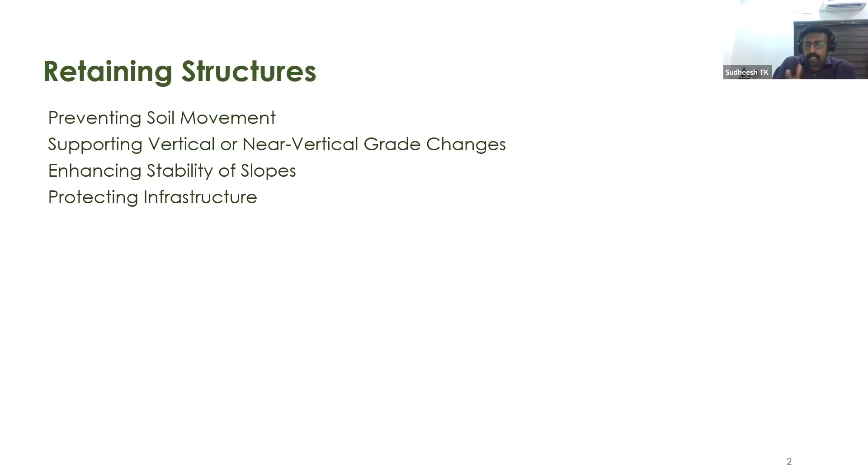There are different types of retaining structures, starting from gravity retaining wall, cantilever, counterfort, and many others. But based on construction approach, we can broadly classify these into two categories: one is bottom-up approach, and the other is top-down approach.

In bottom-up approach, most retaining walls like gravity retaining wall, cantilever, counterfort, and reinforced earth wall all come under this category, because we start construction from the bottom and then go upward. For example, cantilever wall construction starts with leveling the ground, then constructing the base slab, then going upward. Reinforced soil is similar - we put soil in layers, add reinforcement, and compact the layers.

Whereas in the other approach, top-down construction, we are installing or constructing from the top in the downward direction. One good example is sheet pile wall - we drive the sheet pile from the top into the ground.

Similarly, soil nail can be considered under top-down, even though we can use it in bottom-up construction too. Just like reinforced soil, we can compact soil and put nails in, or we can first fill and compact, then install from top to bottom. But typically, especially for excavations, vertical cuts, or slopes, we generally start from the top and progress downward. We can do it the other way in some special cases.

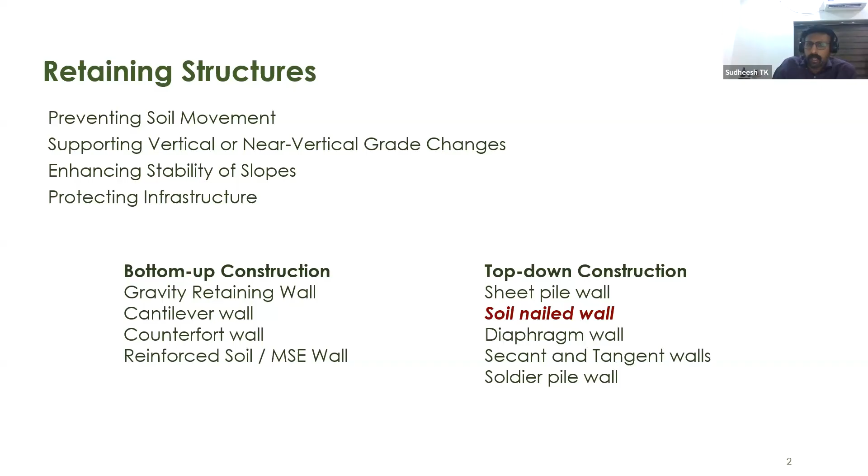Similarly, diaphragm wall, secant pile, tangent pile wall, and soldier pile all come under top-down construction. Now, let's focus on soil nail.

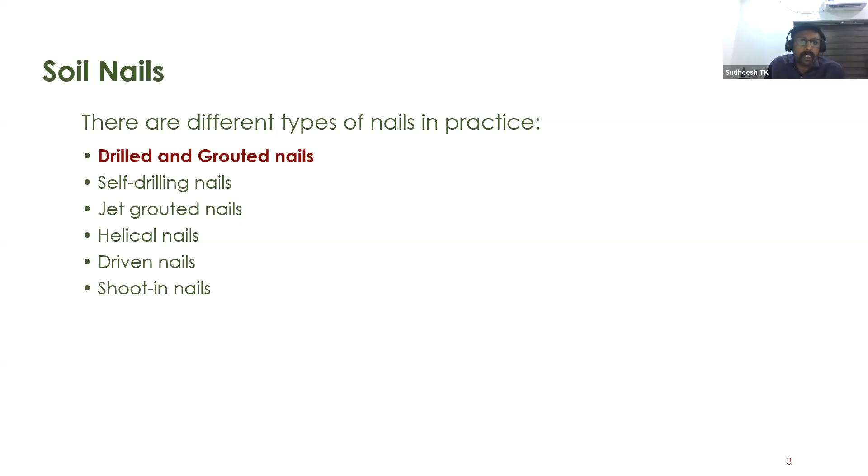There are different types of soil nails used in practice: drilled and grouted, which is the most commonly used one, self-drilling, jet grouted, helical driven, and shoot-in nails. Among these, drilled and grouted soil nails are the most popular.

We place some spacers as well to ensure it is exactly in the middle of the hole, then we pour grout. This grouting can be done either as gravity grouting, where we just pour and fill it, or as pressurized grouting. For pressurized grouting, in conventional pressure grouting we have to use packers to build the pressure, otherwise we cannot build it. Pressure grouting can improve the pull-out resistance significantly.

But pressure grouting has a disadvantage as well - sometimes this grout may go somewhere else. We don't know if there are cavities, and it may keep going. So that can happen.

Recently, we have developed a membrane-confined pressure grouted soil nail, for which we have applied for a patent. What we do is attach a polyester membrane around the nail, and the grout fills that membrane and expands. So the grout cannot go anywhere out - instead, it expands. This simulates a cavity expansion scenario and thereby improves the pull-out resistance significantly.

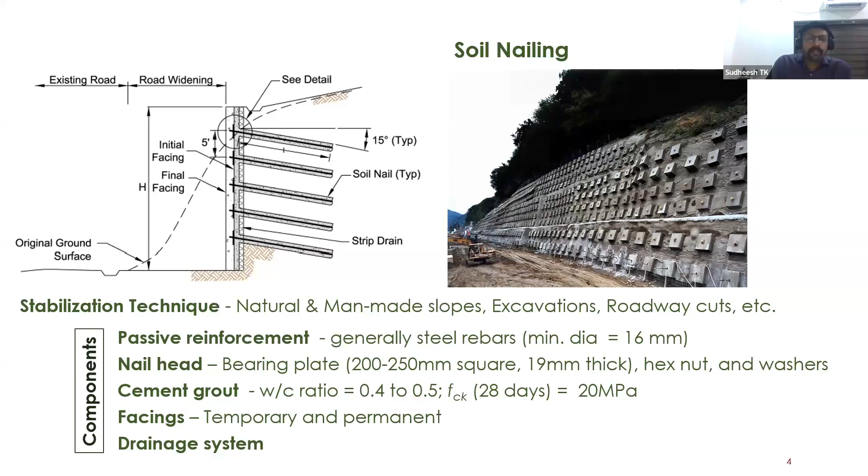So the three important references we generally use in the Indian context are: the MORTH specification for road and bridge work, where section 3200 talks about soil nailing, though it's only 4-5 pages and not in much detail. The FHWA manual covers soil nailing in detail and is available online for download. Then there is the British code, BS 8006-2, which is also for soil nail but not freely available; we have to pay for it. So these are the three codes generally used in India for the design and construction of soil nailing.

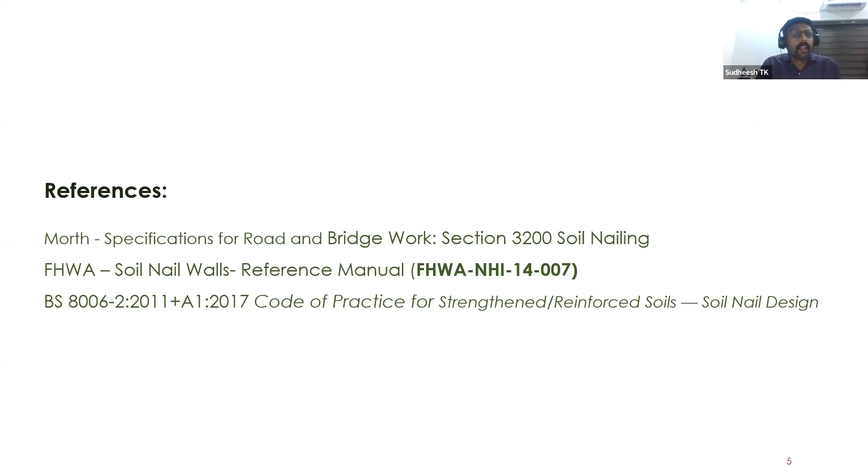Now, if you look at the cross section, on the right, the left image I have already discussed. In this particular case, we can see a dotted line, that is the original ground surface. Maybe in connection with the widening of a roadway, we are cutting this triangular portion of soil, and to support the remaining soil we are using soil nailing.

Though we could use a reinforced concrete retaining wall instead, the issue is the base slab. We can design with a longer heel slab, which increases the moment, and the soil on top of the heel slab also contributes to stability. Or we can design with a shorter heel slab and a longer toe slab, which also increases the moment, but then we don't get the benefit of the soil on top of the heel slab. Considering cost efficiency, contractors generally prefer soil nailing.

But as we have seen, we have to do it very carefully, otherwise it's going to fail. That is what we have seen, so this talk is focusing more on that line.

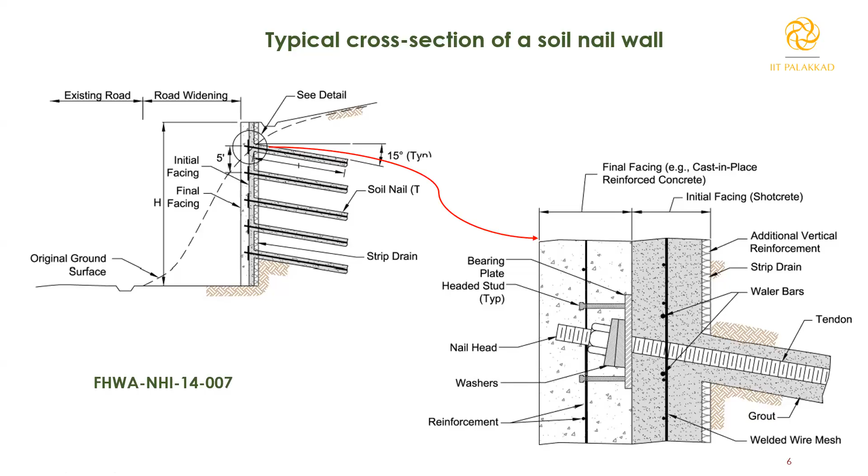Then you have, when I move my cursor - is it visible? Yes sir, okay. So you can see here bearing plate, then we have a washer and hex nut, and then there is a headed stud as well. The purpose of that is to connect this nail and the initial facing with the final facing. So we'll be tying this stud with the rebar or wire mesh of the final facing.

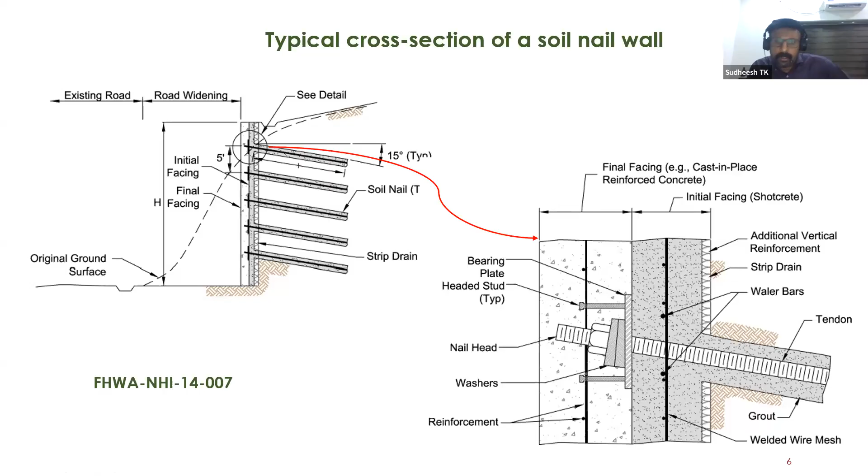Actually many people think the purpose of the facing is just to prevent erosion or ensure local stability. That is kind of true in the case of a reinforced earth wall, where we have the reinforced soil mass with facing, either panels or modular blocks. In that case, the facing is not directly contributing to the stability of the reinforced earth. It actually provides a platform or formwork for soil filling, and also prevents erosion.

Third, it provides stability against localized failure, and also serves an aesthetic purpose. This facing is actually a structural element, right? Yeah, we'll talk about that in the next slide. So this has to be designed properly. We cannot take it lightly, this facing, both temporary and permanent facing.

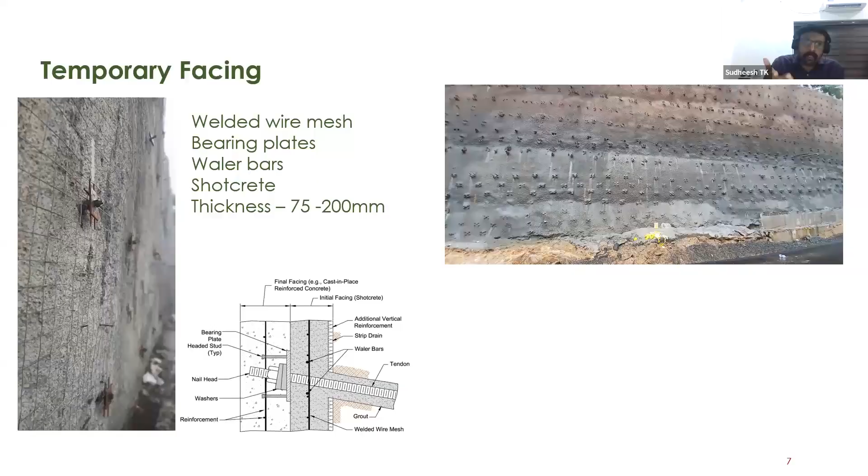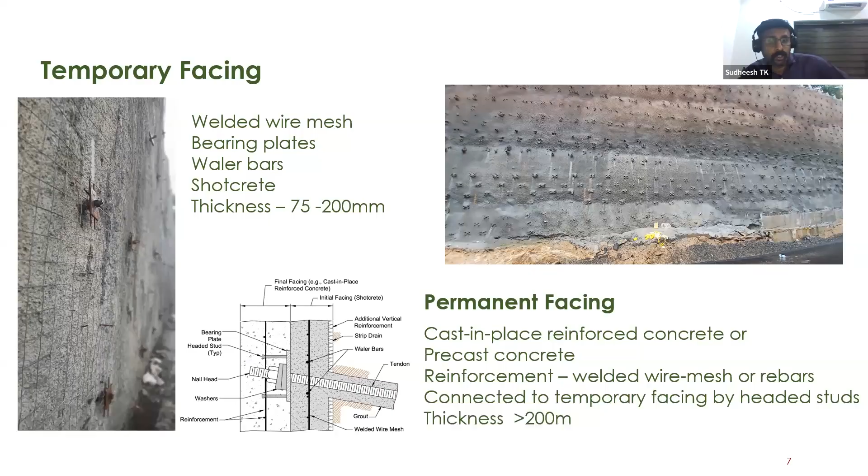Then above this, we have to put the permanent facing. When to put it, we'll talk about in the next slide when we discuss construction sequence. Permanent facing could be either cast in place, just like this temporary facing, or precast. Temporary facing is always cast in place. Also the reinforcement can be either welded wire mesh or rebars, just like this temporary facing. It's connected to the temporary facing by means of headed studs. The minimum thickness of permanent facing has to be 200 mm, that is 20 centimeters.

Now, one question: whether it is suitable in all soil conditions. That's a question you all may have in your head. Basically, the codal standards are suggesting some checks. One way you can check is when you make a cut of 1 to 2 meters, if it's able to stand without failure for about 12 to 24 hours, then you can say the soil is suitable for soil nailing. Otherwise, when you cut it, it's going to fail, and you cannot use soil nailing, you have to go for some other technique.

Secondly, during excavation, if it's below the groundwater table, again this is going to fail. We cannot use it; the excavation has to be above groundwater table. I'm not talking about perched groundwater here, but typical groundwater table should not be present. If it's perched groundwater, we can try some dewatering technique to keep it stable till construction is complete. Then we have to use appropriate drainage provisions to ensure stability.

Now, what are the favorable soil conditions? One is stiff to hard fine-grained soil. Fine-grained means soil like clay, or clay with silt-like particles, where more than 50% is passing through 75 micron - in that case we consider it fine-grained soil in general. Such stiff to hard soil, we can easily make a vertical cut without failure.

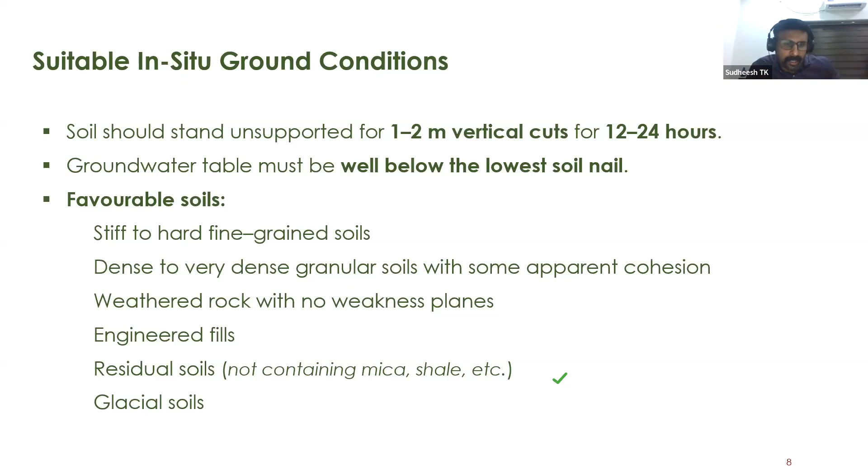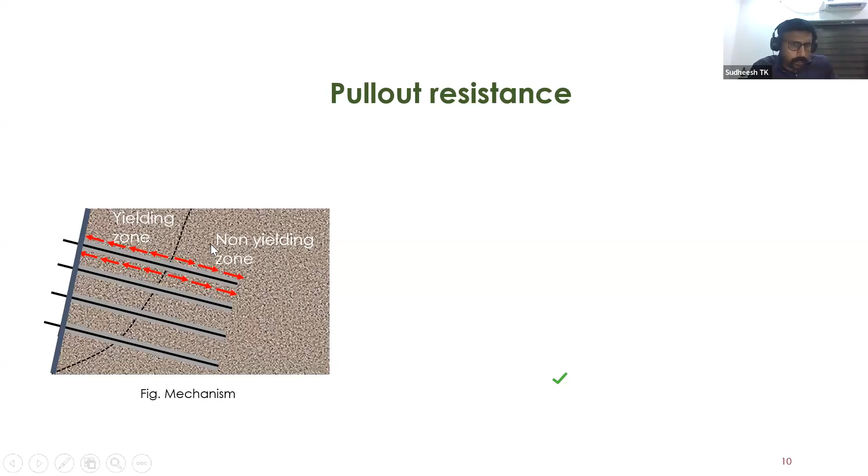Facing, okay, that's why I told you initially facing is a structural component.

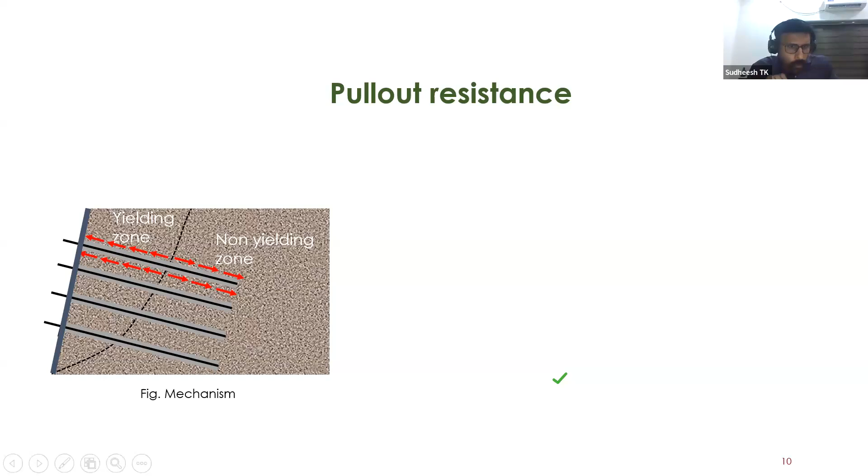Now from facing through the connection, the load is getting transmitted to the, hello? Hello, am I audible? Yes, sir. Okay. Now you are audible.

So basically, one is here you can see this load is going to act, this creates tension on the rebar. This is actually tension on the soil nail, because the load is acting outward, and from the facing it is getting transmitted as tension to the rebar.

Now, as I told you, in this zone you have skin friction mobilized this way towards the movement direction. So the resistance contributing is this one, along the surface. So what will be the contribution? That will be equal to the surface area of the nail segment within this one. We call it as a bond length or zone, the length within the only non-yielding zone.

So you can write down resistance, pull-out resistance, equal to pi d LP, where pi d means the perimeter, and LP is the surface area into unit bond resistance or unit skin friction along this. So this is a pull-out mechanism, the most important mode of failure, pull-out failure, you generally observe in this soil.

So you see that typically for top nail, the length, the portion is smaller compared to the bottom. So the contribution of the top nail is relatively less in the long term, but short term during the excavation process or during the construction stages, this is contributing significantly, top nails as well. And also this is going to prevent local failure in this zone, like the top soil area.

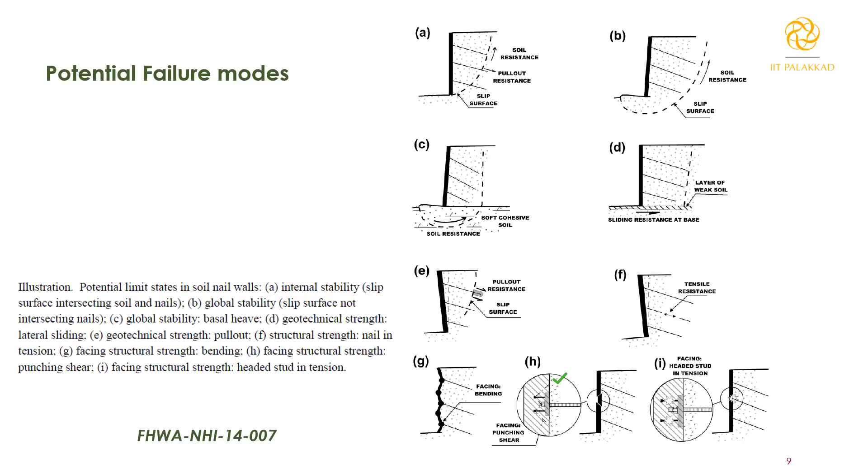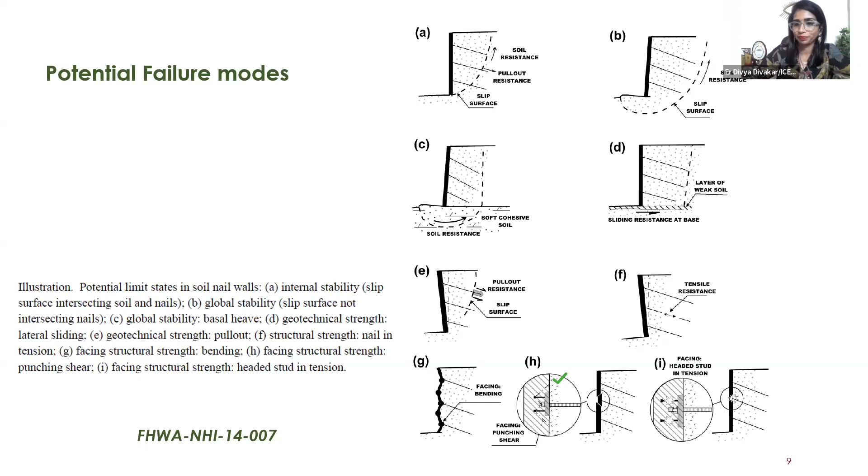Sir, you're on mute. Sudheesh sir. Yeah. So I think it's better to take questions at the end, right? Some of the questions I'll be discussing in the next 30 minutes. So sir, he'll be addressing the question. Meanwhile, if anything is there, you can put it in the chat box so that it's finally addressed. Because most of the questions I don't know, I may be discussing, so if not we can. Yes, this time is enough sir. This particular question anyway I'll be discussing. So okay, I think we can continue. You can continue sir.

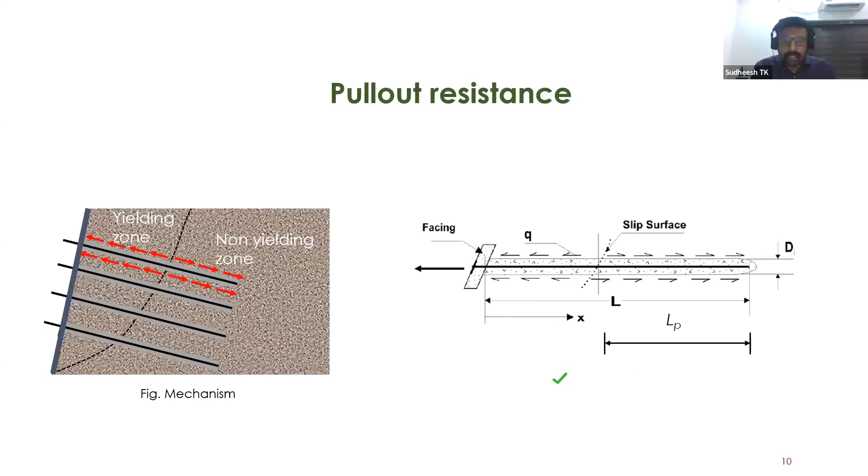Okay, now I hope this slide is clear, and especially this pull-out part is very important. This pull-out mechanism is very important for soil nail. So here you can see that only the portion which is in the non-yielding zone is contributing. So if you want more resistance, you have to increase the length of the nail in the non-yielding zone, right?

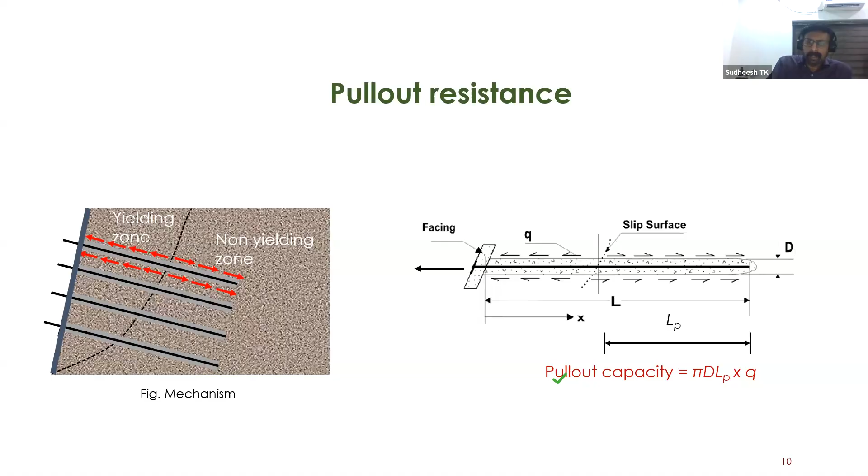Now see this equation, we have pi dLp, that is surface area, and unit skin friction, or we call it bond resistance or bond strength, Q. How do we obtain this Q? That is a value typically we essentially need for the design of any soil nail. So there are some presumptive bond strength values given in the literature, like in the standards.

Here you can see this first table I have taken from the FHWA manual. This is for cohesionless soil on the left, and the right one for fine grained soil, meaning clay soil. So for different drilling methods, rotary drilling or augered cases, or different types of soil, even within cohesionless soil, we can have different combinations like sand, gravel, silty sand, silt, Piedmont residual soil, and so on. Bond strength values are given here in PSI, but we can convert it to kPa, and some other textbooks give it directly in kPa.

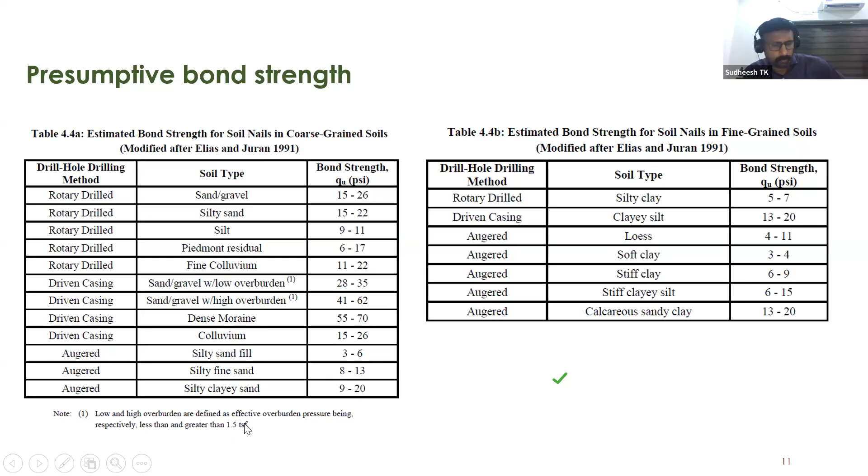Otherwise we can convert. Here you can see some cases they have given, for this particular case, sand gravel with low overburden or sand gravel with high overburden. So low overburden means, as given in the footnote, 1.5 TSF. This 1.5 TSF is about 160 kPa, that is kilonewton per meter square. So if you're taking about a 16 kilonewton per meter cube soil, this is equal to, which means for wall height less than 10 meters they are considering low overburden, but above that, high overburden.

But even within this 10 meters, we have nails at different elevations. This will have a significant influence because the top nails may not have as much bond resistance as the bottom nails. So these values you can use in preliminary design, but we have to do pull-out load testing to verify this. We'll talk about that.

So now, typical initial design considerations will include - we have seen that the nails are slightly inclined. Typically FHWA says like 10 to 25 degrees. So coming to that question, like 15 degrees - what is typically adopted is 15 degrees. So why do we need to provide 15 degrees? That is one question. Why can't we have it horizontal?

We can consider horizontal as well, but the issue is if you are performing gravity grouting, when you pump grout to the hole, if it's horizontal or at 5 degrees or so, what is going to happen? We cannot fill the hole completely - we may have some air pockets during the filling. Whereas when you have an inclination more than 10 degrees, 15 degrees and all, this grout is going to completely fill the hole. That is one of the reasons for providing this. There are some researches on what is the variation of pull-out capacity with inclination and all, I'm not going to discuss that, but typically we provide 15 degrees based on just to ensure that the grout completely fills the hole.

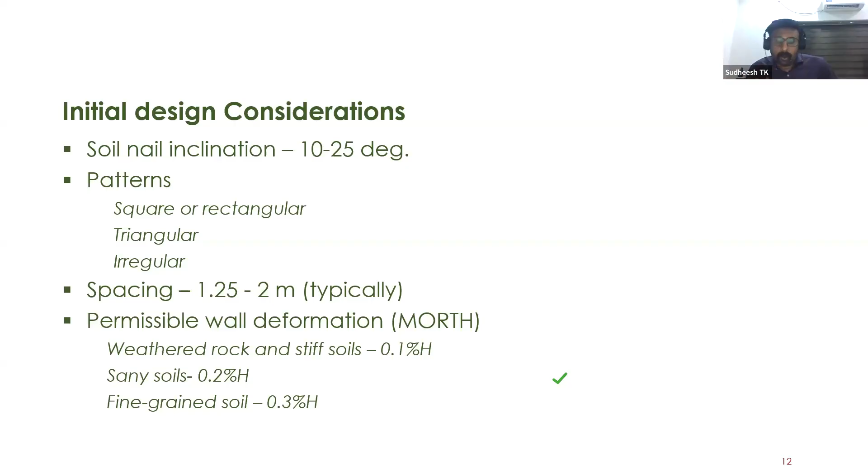Caltrans, the California Transportation Department, has their own software like SNAIL, S-N-A-I-L. That was the older one, and now they have SNAILZ. Similarly, FHWA has SNAP2, Soil Nail Analysis Program. In India, we don't have access to these, but we can use other slope stability analysis software like GeoStudio, SlopeW. We can model soil nails there and perform all this analysis, A, B, C, D, using that. For D, you can consider a thin, weak layer and force the failure to happen through this. So all four you can handle using such software packages.

Now, pull-out resistance, as I told you, if you know the critical failure surface, which we generally obtain from analysis A, B, C, you can identify where the failure surface is and what is the length of the zone, and accordingly calculate the pull-out resistance. There are also some charts available for calculating the length of soil nails and load or tension on the soil nail. That is useful for F, and also for the connection load. There are charts available in literature, published by Lazarte, and later in textbooks like Han and others; it's readily available. We can use that for design purposes, or you can do the analysis yourself, performing it once without reinforcement and once with reinforcement.

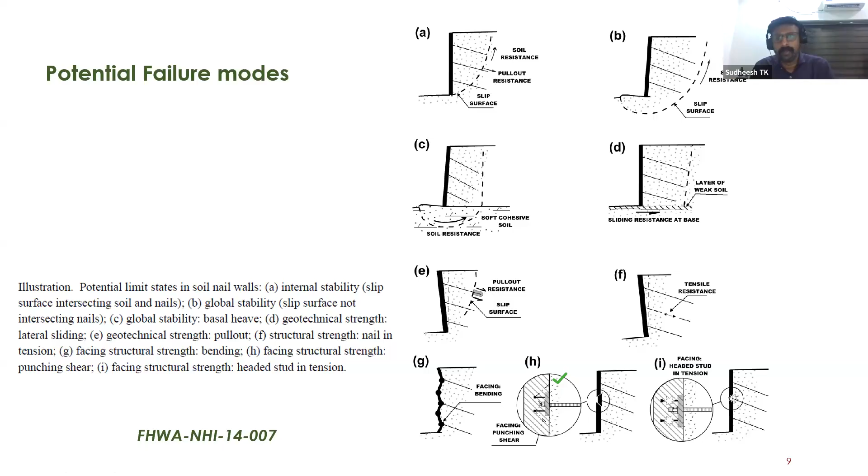Okay, I hope these are clear so far. So this presumptive bond strength we are using, I just showed you.

Now this part is very important: construction sequence. This is a stage where many contractors, knowingly or unknowingly, make mistakes - most probably I would say it's knowingly. Because if you Google it, you can find the construction sequence of soil nailing and get a similar image. Any engineer involved in soil nailing work will be aware of this; they can just Google it.

If stable, then you have to drill a hole - first the top nail you have to drill. You drill a hole, then lower your tendon and perform grouting. Then you put the drainage layer - we'll talk about the drainage layer - then put the wire mesh, and for step 4 you are shotcreting, or constructing the initial facing. Once this is done, you proceed with the second stage of excavation, like 1 to 2.

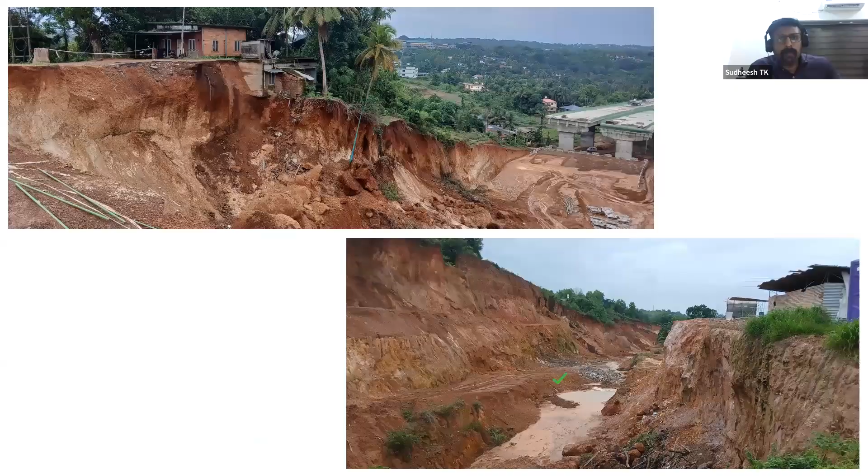I'll show you many images where it can go wrong. This same image I also saw in one of the newspapers. Here you see, in the image you don't feel that it's deep, but it's a very deep excavation in fact. Here also is very deep excavation. In all these cases, they have simply cut it. They should not have done this way, they should have done it in stages. That is one mistake we can observe.

Similarly, sometimes what contractors do is just spray shotcrete, temporary spraying. Actually this temporary spraying may prevent some localized failure, but it doesn't offer any structural benefit, because if heavy rainfall happens, water can percolate and increase pore water pressure, and it can fail. So it's not contributing, maybe temporarily it's supporting, but many places this is happening, and it's not providing much. This simple shotcreting has no wire mesh, nothing. This they do after a big vertical cut.

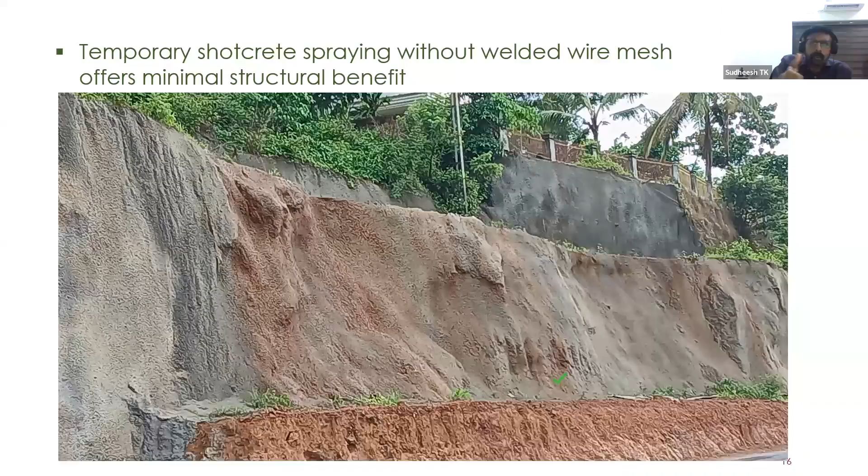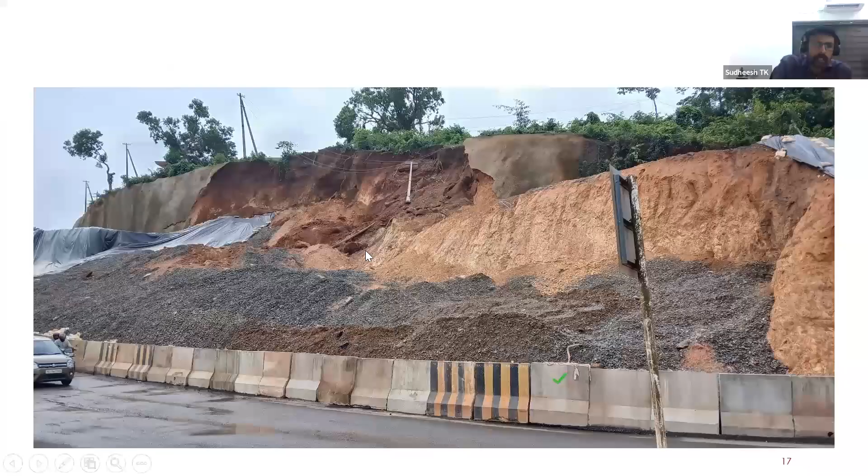Similarly, in one such case, what has happened is they put shotcrete spraying on top without wire mesh. You can see during rain, it has failed. Now they have put some gravel, coarse aggregate, at the bottom just to provide stability or prevent further failure. This was not the original part, but they have added it afterward.

Similarly, another scenario, this is an image of drilling of nails. Here also they have put shotcrete initially. Here also you can see they have done this excavation all the way down, not in stages.

After drilling, sometimes the contractors leave the hole open for an extended period, maybe 1, 2, or 3 weeks. You should not leave it that way. Once you drill a hole, what happens is the hole may collapse, or the soil is going to relax, and the actual diameter may reduce because of contraction of the hole diameter. Soil is relaxing, meaning the stress state around the hole is decreasing. This can also decrease the pull-out resistance. Also, if rain happens during this period, it can fail.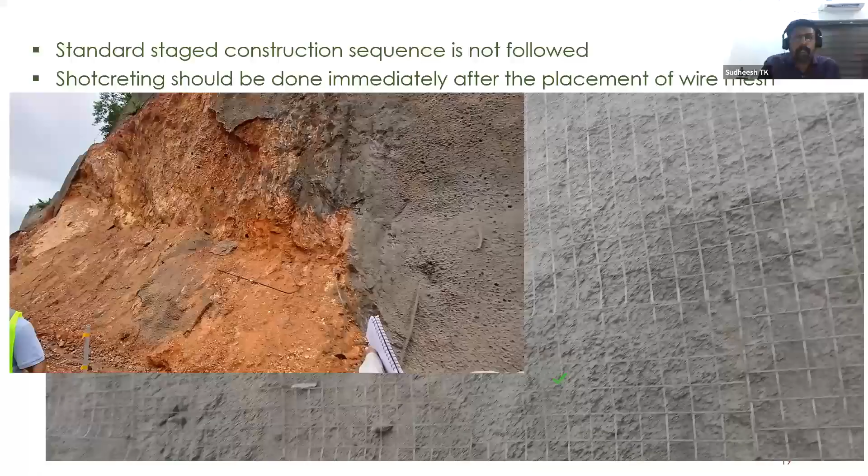So this is another failure you can expect, also associated with improper construction procedure adopted. Here again, you see in this particular image, nails and plates, everything. Wire mesh again is not visible here, so it appears like wire mesh was removed, because otherwise this plate will not be there, right?

So in this particular case also, shotcrete thickness may not be adequate. And also sometimes, because of this failure, the nails get bent. This bending of nails also happens. So this particular case also, the issues are improper construction sequence not adopted, improper drainage, and inadequate facing. These are the three reasons for this failure.

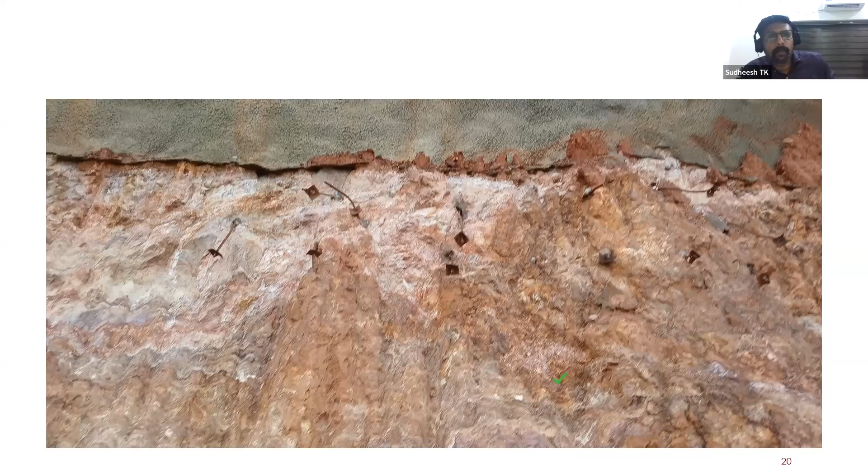Of course, it can depend on soil properties as well. We'll talk about that in the coming slide. This particular case, you see there is no final facing, and the spacing between the nails was very high, about very large, like more than 2 meters. You see one nail here, another nail here, like that. The spacing is much more than 2 meters. So this is another reason - the design of nailing was not adequate in this case.

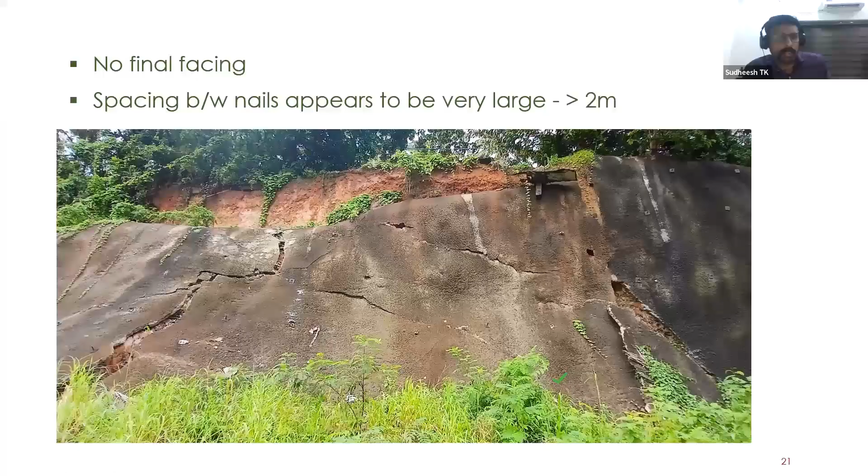So now, as I told you earlier, the initial design uses presumptive values that I have shown you in the tables, right? I think time is 8:50. Yeah, I think I have a few more slides.

So we have to verify this on site. That is very important. At the site, we have to perform pull-out load test. So typically we do verification test that is done before the construction. In the design phase itself, we have to perform this drilling operation, construct a nail and perform pull-out load testing. And also after construction of the soil nail wall, you can identify a few random nails and perform testing that we call proof test. That is just to ensure that it meets the design pull-out resistance.

So this left image, I have taken from the FHWA manual, and this is actually a field test. The right one is actually our own pull-out load test, which we have done in a large model test. Our research students are doing this testing. You have a load cell, a jack, and some plates - the jack will apply load, and the load cell will measure the applied load. Then you have a displacement monitoring system, which includes LVDT and a string potentiometer.

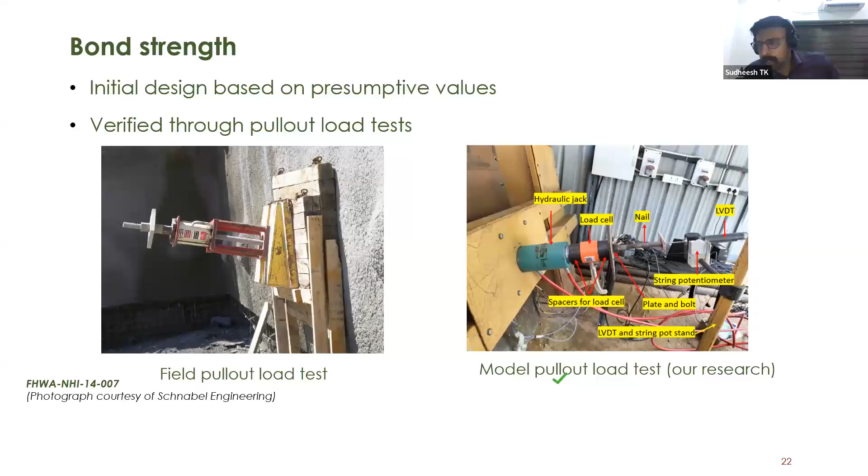So we have to be very careful with this pull-out load test. Most of the time these pull-out load tests are misleading, because what actually happens is they use presumptive values. I'll show you some comparison - our experimental model test results in sand versus lateritic soil.

See, this is what we got. In our case, overburden stress was very low, like about 15 to 30 kPa. You see the bond stress value we got is about 10.3, 20.3. For lateritic soil, it's even less, like 14, 12, etc. And also you can see in partially saturated versus fully saturated, this also decreases. But look at the values I showed you in the table, the FHWA values we discussed in the previous table - these values are very high. You can see here, the reason is we are dealing with a very small overburden stress.

Now my question here is, in our model test, we are probably representing the topmost nail or so. But in a typical design, what they are doing is they are using this value for all the nails.

I'm not saying all contractors or designers, but many of them consider uniform values for all the nails. That is not correct. We have to consider these values appropriately.

This can only be verified by performing the pull-out load test. We have to perform it at different elevations, maybe one near the top, because initially we may not have a vertical cut there. So in the design phase we may not be able to do that, but as excavation progresses we can. If we later find the lengths are not adequate, we can install additional nails to overcome that.

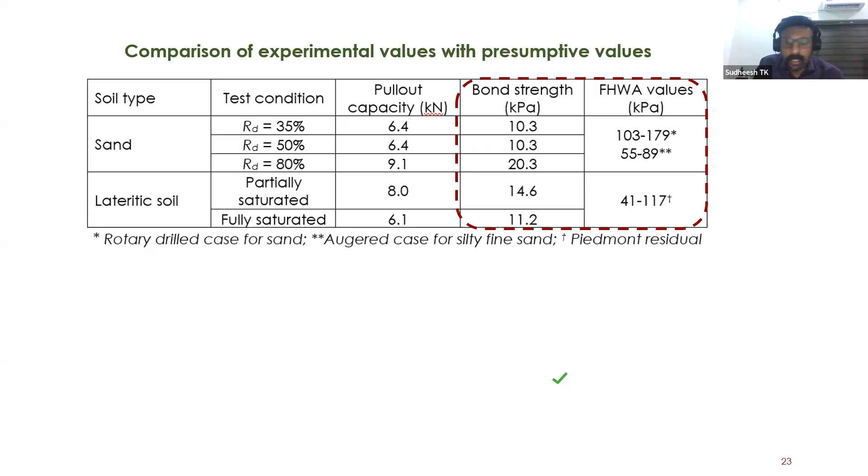Now my question is, can we trust these pull-out load test results? That is very important, right? We perform pull-out load tests in the field, so can you trust that?

We have to be especially careful when dealing with lateritic soil or fine-grained soil. We have seen that bond stress is directly proportional to effective stress. As depth increases, confinement increases, so bond strength will be higher. But in a partially saturated soil, not generally in sand, but in fine-grained and lateritic residual soils, we can have this apparent cohesion.

See this equation: effective stress has two components. This is the net stress, we call it total stress minus air pressure, U is air pressure, plus chi, which is the effective stress factor or coefficient, times the difference between air pressure and water pressure, since it's a partially saturated system, not fully saturated. This difference we call suction, or matric suction. So effective stress equals sigma plus chi S. This chi S is the additional effective stress due to apparent cohesion.

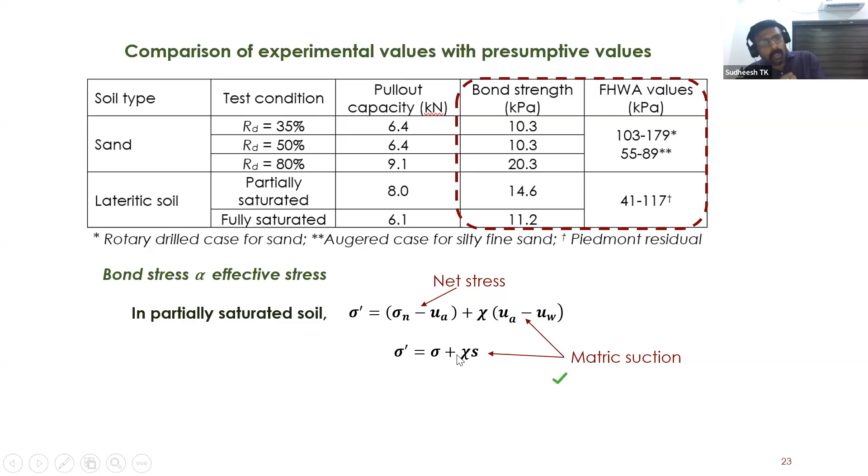Now if you write the shear strength equation, shear strength equals cohesion plus effective sigma tan phi - this is what we've learned. But for a partially saturated soil, there's one more component because of suction, so the equation has an extra term. The first two terms apply for dry or saturated soil, whereas the third term is there only for partially saturated soil - this is what we call apparent cohesion. In partially saturated soil, this will be very high.

Now if you perform this pull-out load test in partially saturated condition, the resistance observed will be very high. But during rainfall infiltration, during monsoon, as water infiltrates, this apparent cohesion is lost - you don't have that third term anymore. So you have to be very careful: either perform the pull-out load test during monsoon, or else we have to account for it by calculating somehow based on the soil water characteristics.

We call this the SWCC curve, soil water characteristic curve. We can compute the chi S value, and based on the moisture content present at the time of the pull-out load test, we can approximately calculate this apparent cohesion and account for it. That is not typically done, especially in partially saturated soil - we have to be very careful.

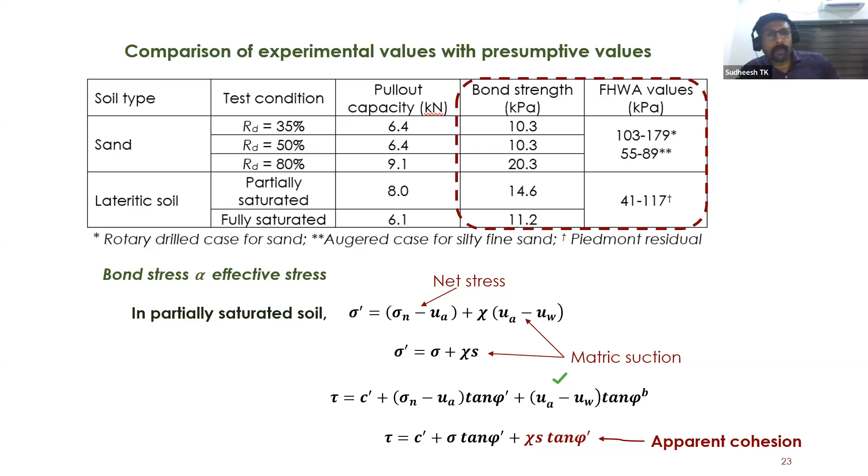Similarly, sometimes for sandy type soil, because of seeping water, some soil particles get fluidized, and the interface friction can further decrease. All these together can contribute to decreased pull-out resistance during monsoon, and eventually cause failure of the system. So we have to be very careful about accommodating the suction effect.

Similarly, creep - you've all learned what creep is, deformation under sustained loading. In soil, especially fine-grained soil, as a function of fine content and other aspects, the soil is going to deform. When this deformation happens, if there is strain softening behavior, pull-out resistance will decrease. Secondly, because of this creep deformation, there will be an additional pressure on the facing.

A nail force increase happens because more pressure on the facing means more load on the nail. We can expect about a 15% increase.

We don't directly include that in the design, but what we can do is consider an appropriate reduction in the bond strength value used in design to account for this creep effect.

Also, we can do a creep test, just like that pull-out load test, but performed for a longer duration. We keep one load and leave it for a longer duration. That way we can perform a creep pull-out load test in soil.

One of my students is doing research in that direction now, on creep behavior of lateritic soil. His plan is to do some model studies, which he has already started. Then we are planning to model, if possible, some trial wall and monitor it. Hopefully we'll have some good results.

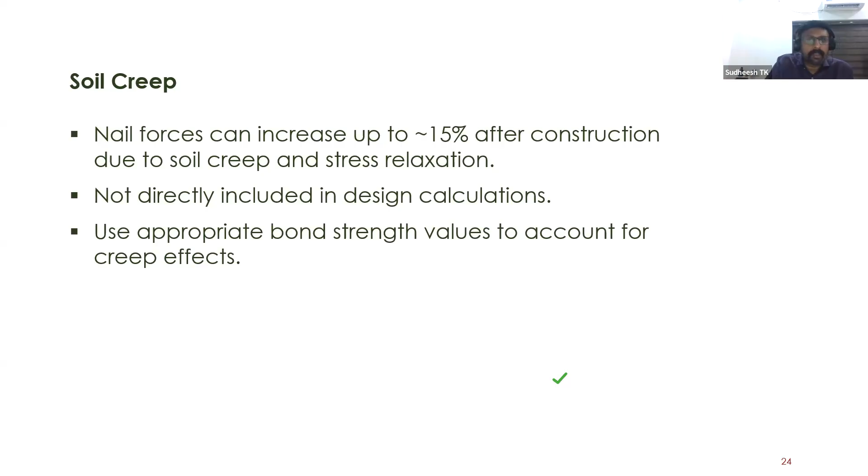Now, detailed soil investigation is also very important. Both MoRTH and FHWA are highlighting this; we have to perform detailed soil investigation. Here you can see the solid line is the alignment of the nail.

What FHWA recommends is to perform boring along the alignment at about every 30 meters, which is 100 feet. This is a cross-sectional view: one borehole at the back side and one at the front. If the height of the wall is h, at the front near the wall you can have a depth of 1h, and at the back 2h depth.

But this is not done properly. We may have a single borehole's data and perform the entire design for a long stretch based on that single borehole. Especially in residual soils, soil is highly variable, and we are not identifying that properly. People want to save on soil exploration, as I mentioned in that meeting. They think it's a wastage of money, but that is not true.

For proper or adequate design, we have to perform an adequate number of borings, so based on this we can come up with the correct soil profile and soil properties for each layer, and use that for the design of soil nails and global stability analysis. But that is not done rigorously, maybe only 1 or 2 boreholes maximum. Even though both MoRTH and FHWA insist on this, we still aren't doing it.

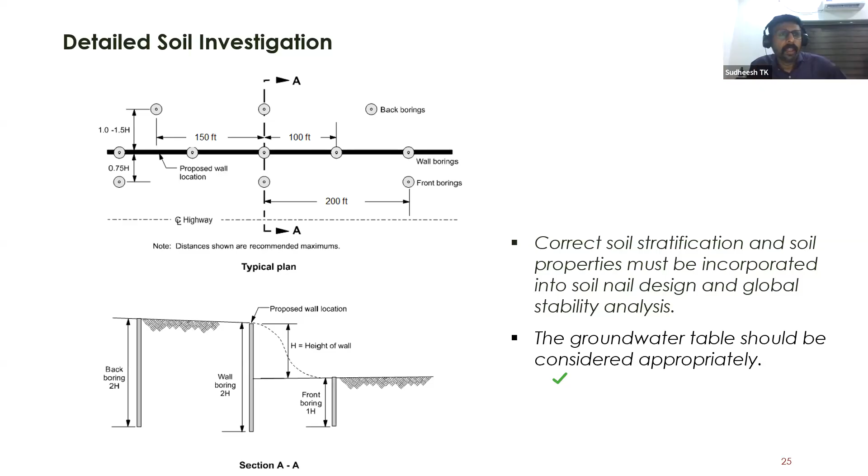Now, the drainage system, as I told you, is one of the most important systems. We have to provide a proper drainage system to control surface water and groundwater, both during and after construction. There are different types, such as vertical strip drains, like some geocomposite we provide at the back side, just behind the facing.

Strips - I'll show you some images in the next slide. These are vertical strips. Then we can put weep holes. You can see weep holes are about 50 to 100 mm diameter, and length can vary from 30 centimeters to 60 centimeters, sometimes even more.

If you are expecting some pore water pressure issue in the retention zone, we can put longer pipes to ensure this pore water pressure dissipates or is removed by allowing seepage. Also, at both the top and bottom, you should have interception ditches.

Here you see a concrete ditch. This has to collect surface water from the top. At the bottom also, we have to provide either a toe drain or foot drain like this. Actually, the water from this filter strip drain comes to this through a weep hole, and then it is carried away. Also, as much as possible at the top, we have to provide appropriate vegetative cover to prevent infiltration of water into the retained fill.

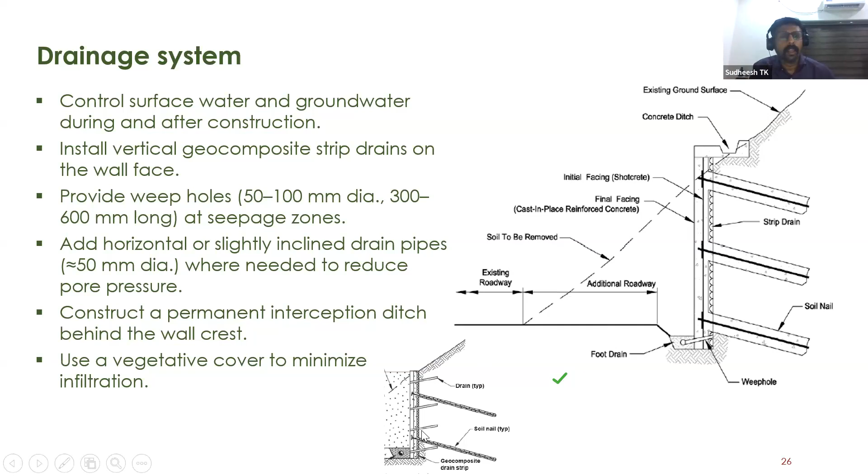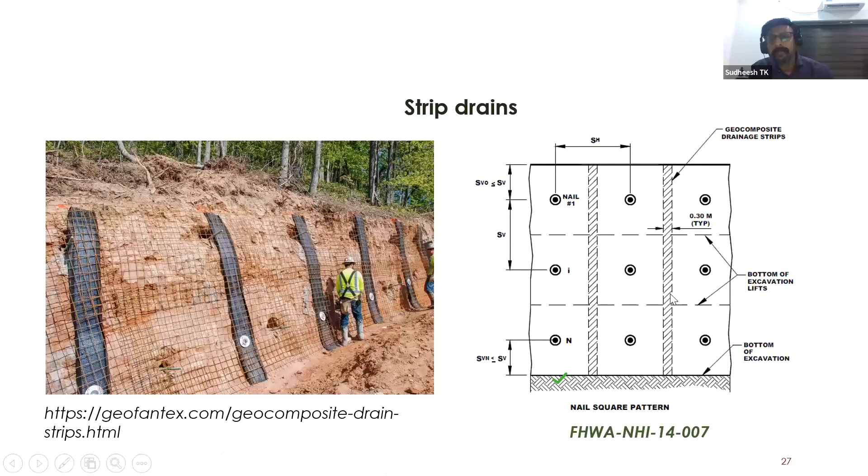This image shows strip drains provided for a soil nail wall. These are geocomposite drains. This is the schematic diagram in a square pattern - these are nails, and you have vertical drainage strips provided here. Then here you can see some toe drain details.

This is a simple toe drain with finished grade. Water gets collected here and carried out. Then here, instead of a toe drain, you have a foot drain, basically a sand filter. You can see sand drain, gravel drain, with a perforated pipe inside, which is then wrapped by a filter fabric.

There are different approaches you can try, but ultimately we have to ensure adequate drainage, because as I mentioned, we don't consider pore water pressure in the design. Now the question is, why don't we consider it? If we consider it, it will be an over-design - very costly. So to minimize cost, we don't consider pore water pressure, but we assume there is none, as we are providing adequate drainage provision.

So drainage in any structure - whether it is a reinforced retaining concrete wall or any geotechnical structure - drainage is very important.

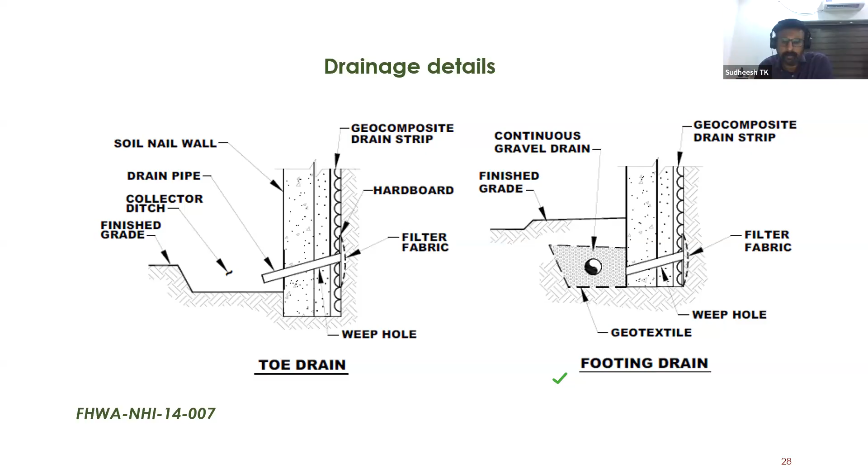Now coming to my conclusion - I think it's 9:15, right? Yeah, yes. So here are the major points I want to put forward to ensure stability of the structure, the soil nail wall, and to avoid any potential failures.

One is, we have to follow proper staged construction practice - that is very important. Then we have to perform a detailed geotechnical investigation before design and execution - no compromise on that. This applies not just for soil nailing but for any structure. We should not compromise on geotechnical investigation, because you may save a few lakhs, or even less, but if a failure happens, we have to always keep in mind how much we have to spend at the end.

Then the design should always comply with all relevant standards and codal provisions - that is very important, and sometimes we don't do that. Whatever dimensions are given, we should follow them, because codal provisions and standards are prepared by experts - they have proposed this based on something, so we should not overrule that. We have to follow that, otherwise what is the point of having Indian standard codes or IRC codes, whatever - there is no point in having such things.

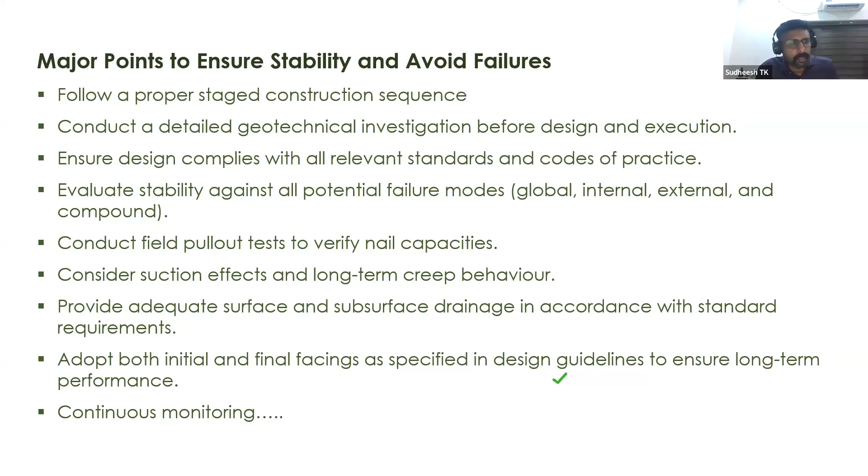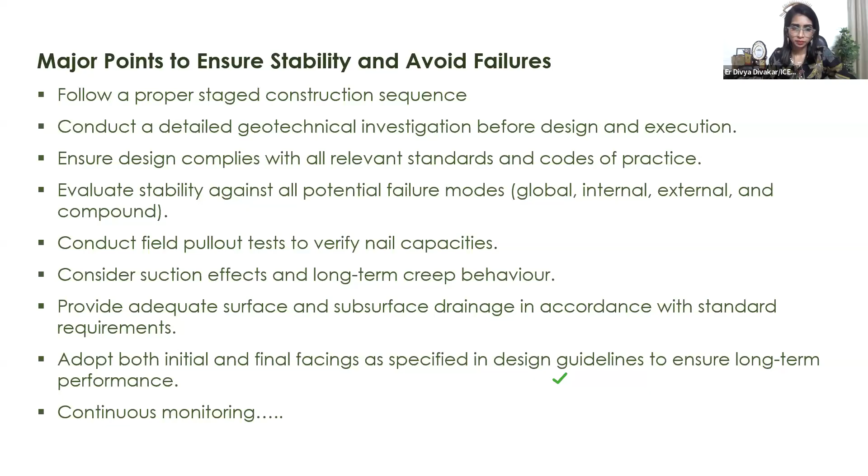Sir, you got muted. Sudheesh, sir.

I would like to thank my research scholars who have worked in this direction. We are mainly focusing on soil pull-out resistance and overall behavior, especially upon rainfall infiltration. I haven't actually included that in this lecture - I thought I would focus more on how soil nail works and what can cause potential failure. I think I have probably taken 10 minutes extra.

No problem, yes sir. It started at 8:05 and then we have in between 2-3 minutes. I can understand. Thank you, now I can take questions.

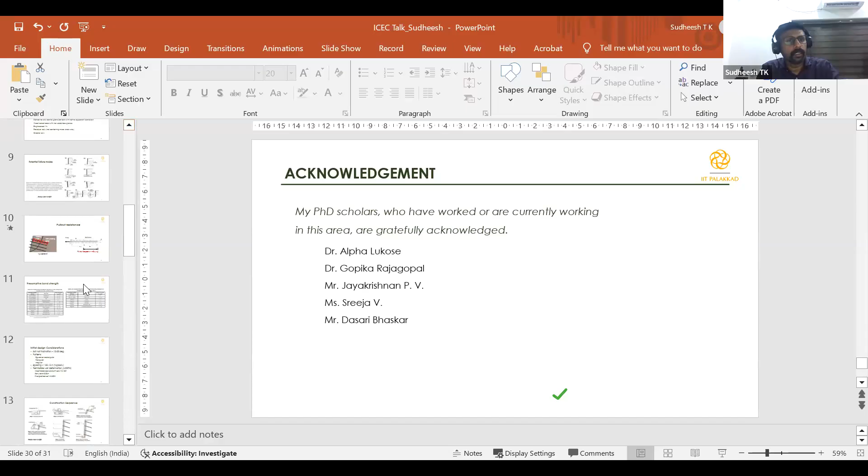One more question - what is the thickness of shotcrete we are preferring for this? We have to design it, but typically what is recommended is about 75 to 200 mm for initial facing and final facing of 200 mm.

We have to perform structural design for it, based on the loading. There are four modes of failure, considering structural failure of the facing mainly - one is structural failure of nail, and the other three are structural failure at the facing. So we have to perform proper design for that.

Otherwise, we have to at least consider whatever is recommended in the standards.

Initial facing is done during the excavation. For the first lift, excavation is done, then we install the nail, then construct the initial facing. Then only we go to the second lift, and we perform it again. By the time we complete the placing, the final facing is done later.

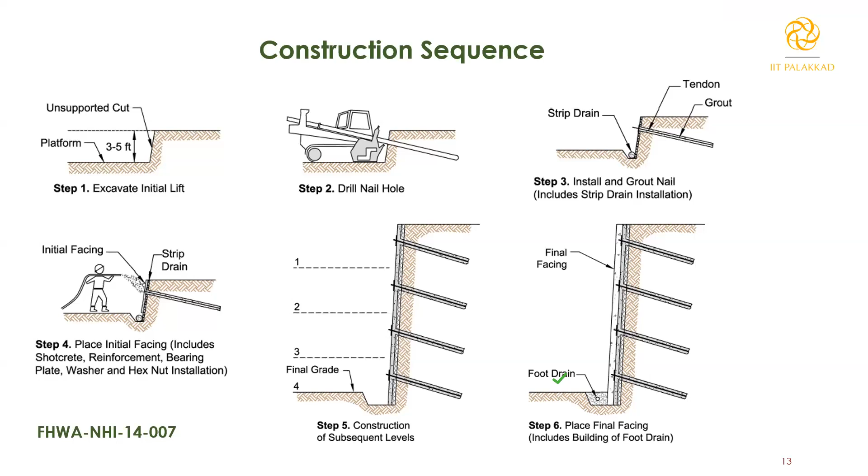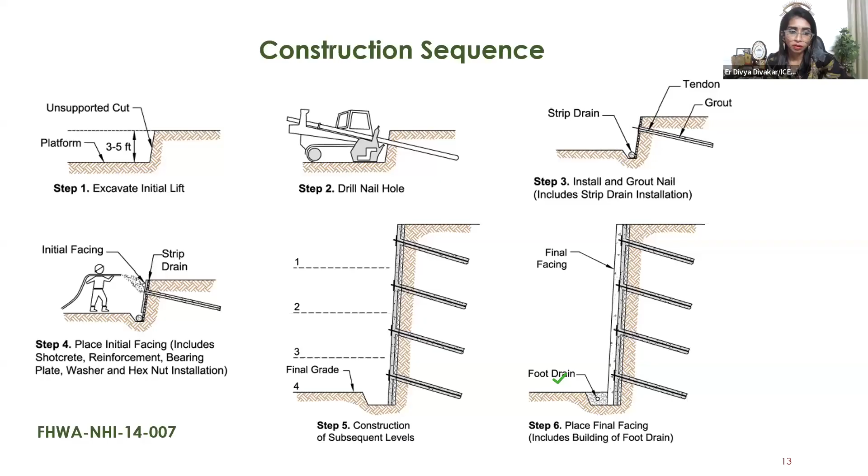No, I didn't understand the question - are you asking about soil retaining at your site? I was asking about soil nailing itself, but what instrument are we using for this drilling purpose?

We need to use the exact system. Ultimately, what we are doing is using an excavator type thing that is holding this equipment. This is not that difficult - we have a guiding mechanism, and then we are using that drill. This is not a very complicated thing.

If you are asking me whether you can use it at your site, definitely you can use it. This is actually a photograph from Kerala only, so it's readily available here.

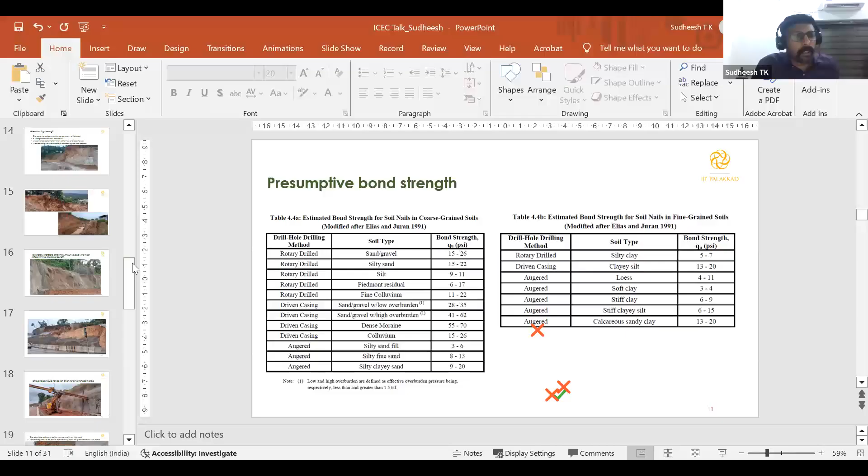If they are using welded wire mesh and shotcreting for the final facing also, then we cannot differentiate. But typically here, I haven't paid much attention to secondary facing in India, but in the US and elsewhere, they are using concrete facing. Yes, in one of your slides I have seen that concrete facing. That's what, on cross section. Oh really, I don't know which one, but I don't have only shotcrete. Probably the initial slides, I think. Yeah, initial slide, you mean this one? No, just after this, sir.

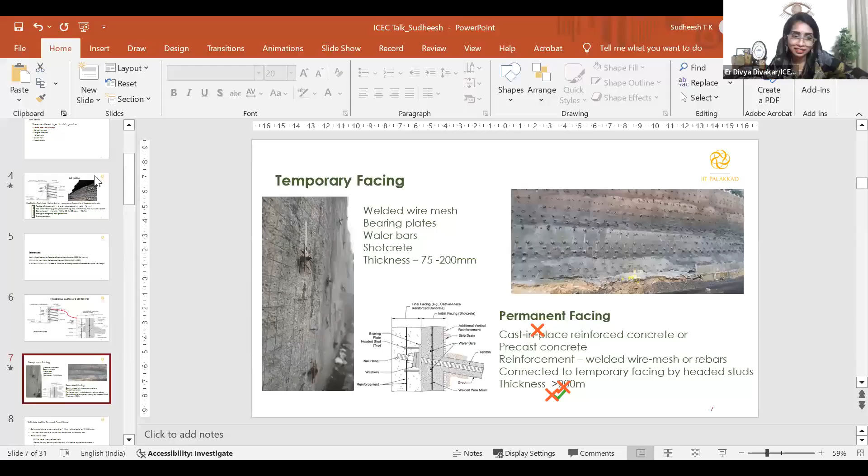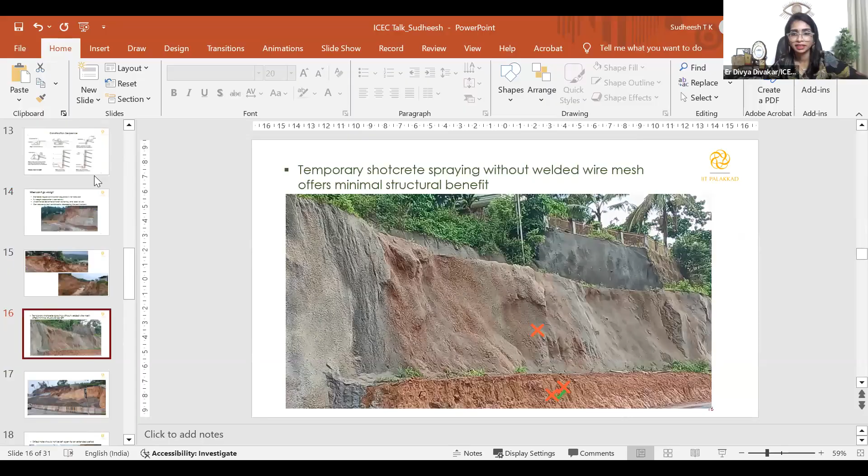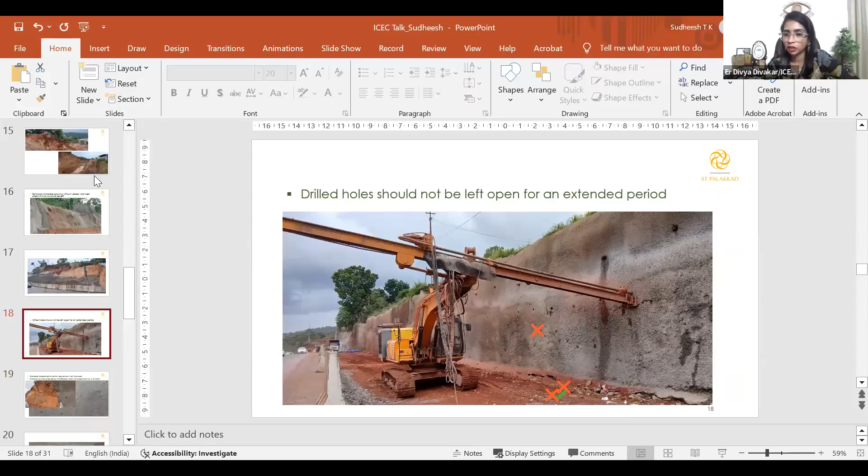Not this one, right? Next. I don't remember, somewhere I have. Yeah, just before this. The previous one, I think. That's slide number 13, I think. I think so, I've seen it somewhere in your slide itself. It's okay, sir, no problem. So anyway, since we are coming to slide 13, is there any additional questions? Anyone else? Quick question. Yeah, can I ask a quick question?

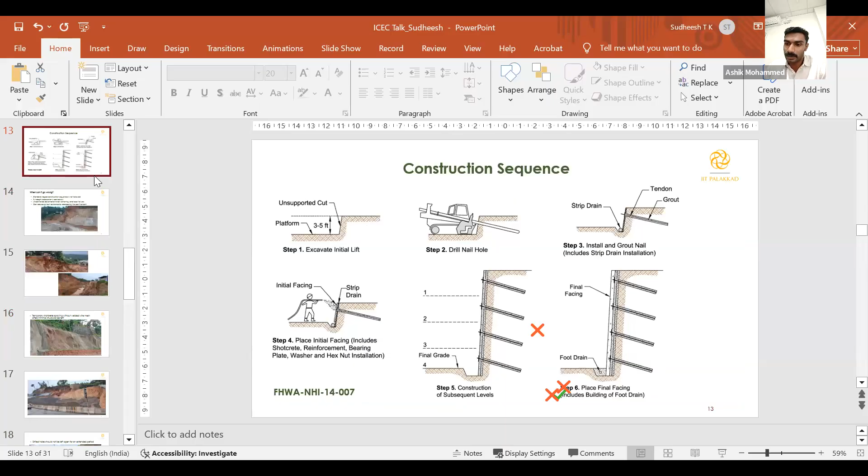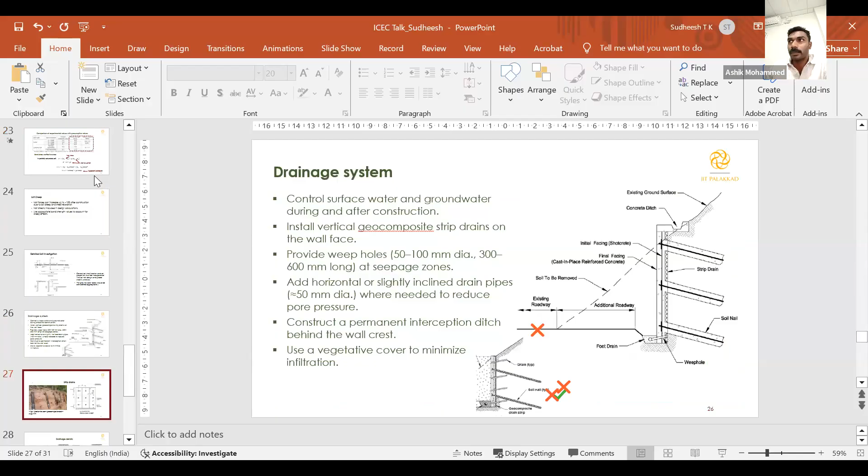Yes, please. It's about the slope of the facing and the height - what's the maximum height we can adopt, or is there any height restriction for adopting the soil nail technique? Up to how much height can we adopt this, and is there any height restriction for that? From the previous slides you explained about the slope - is it almost vertical, or is there some slope? Is there any safer slope like 15 degrees or 20 degrees, any thumb rule from previous experiences?

Actually, this height again depends on the soil profile - what type of soil it is, we can consider. If the soil condition is not that favorable, we can consider soil nailing with a horizontal platform. For that case, maybe you can consider 5 to 7 meter height for each segment, then a horizontal bench, and then continue.

But one constraint is you should have adequate right of way. That is a challenge I think typically the designers face - they may not have adequate right of way, especially in our context we have space constraints. Especially in the Kerala context and all, we don't have much acquired land. In that case, to be on the safer side, it's better to provide a bench and acquire more land and ensure adequate space. Also, if you ask me, for example in lateritic soil and all, what slope angle I would prefer - maybe like 70 degrees or so instead of going with vertical.

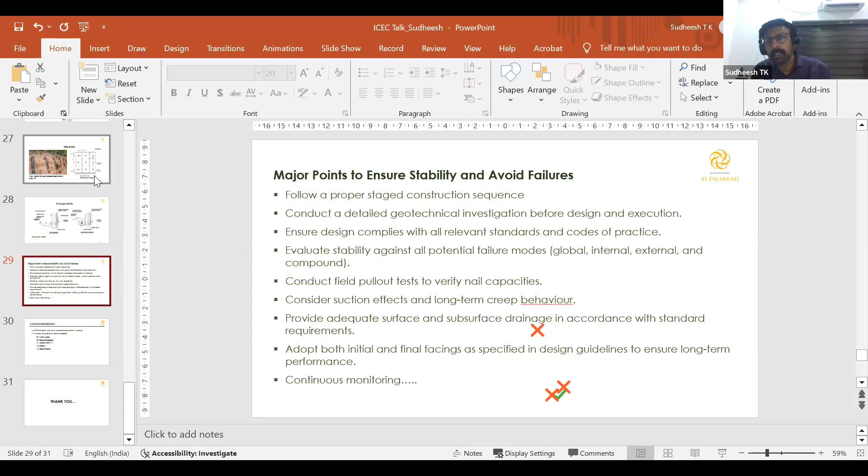Okay sir, thank you. Any additional questions? If at all any questions are there, in addition to this please do connect with us so we will get in touch with Sudheesh sir and get it addressed. Please, if you have any additional question, share with me. If I know, I will share. If I don't know, I'll try to find it out, then let you know. And with this, since the time is becoming 9:45, I would like to conclude at this point. I'm inviting our respectful engineer Ashik sir for giving a vote of thanks.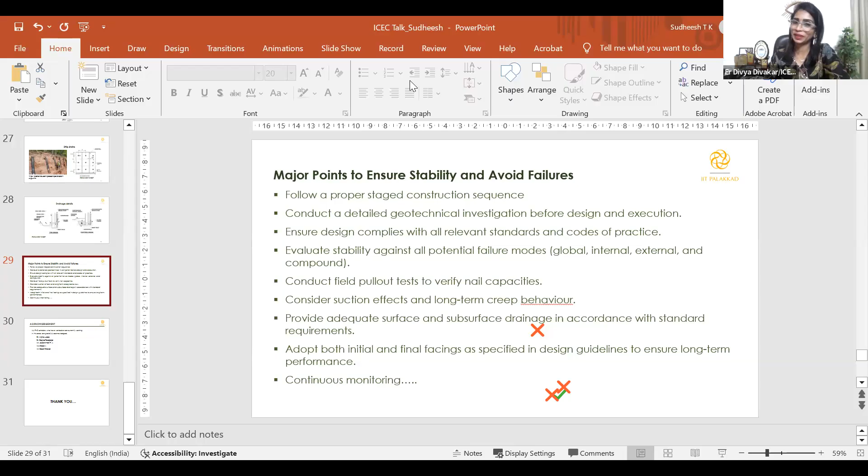Thank you, sir. Thank you, sir. Thank you, Annapurni ma'am, too. Thanks to all ICEC members. We'll see again with the next webinar session soon. Thank you all, Saturday good night. 9:45, yes, and 40 people. Commendable, thank you ma'am, thank you so much sir for your time. Okay, thank you all, right. Great weekend, bye-bye, thank you. Bye, thank you, all right. Bye, good night.